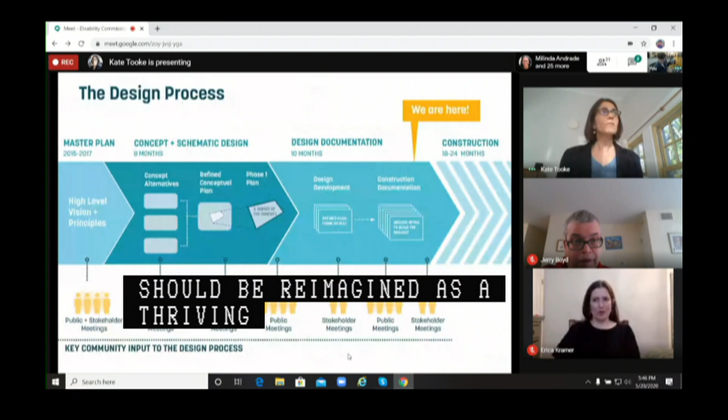You know that it's 8 acres of brick as it stands today. This process was really started in 2015 by Mayor Walsh, who stated a vision that the plaza should be reimagined as a thriving, healthy and innovative space that made Bostonians proud. That launched a process which has been several years in the making, starting with a master plan of both the building and the plaza led by Reed Hilderbrand and Utile, two local design firms.

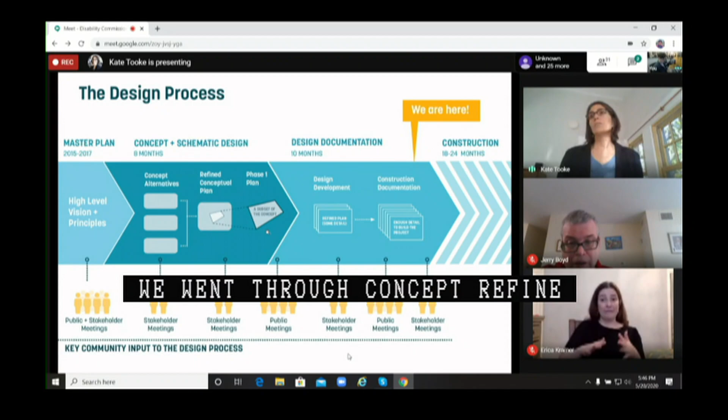Sasaki was brought on to lead a concept and design process for the first phase of renovations. There have been a number of different opportunities for stakeholders as well as the public to interface with the design throughout the process. We went through a concept refinement process where we looked at many different options, revised and refined those into phase 1, and are now at the very end of a construction document process and ready to break ground this spring.

Again, we've spoken to a number of different stakeholders throughout the process. These are constituents from all over Boston, young, old, many different interest groups, including many times meeting with the disability commissioners and staff members. We heard a lot of different things about the plaza, everything from universal access being really important to shade and comfortable seating.

What we did as a design team is we took all of that great feedback and summarized it into 4 guiding principles for the plaza.

So a welcoming and civic front yard is really about daily use, ensuring that the plaza can welcome all Bostonians, no matter how they arrive at the plaza, and help them be comfortable for daily use.

A flexible and accommodating event venue is about ensuring that the plaza can host a diversity of different kinds of events year-round, 24/7, and really make those events comfortable and welcoming to all Bostonians.

A model for sustainability and resilience captures all the feedback we heard about ensuring that this renovation really models the best thinking about 21st century practices in sustainability and resilience.

And finally, a renewed cultural and architectural legacy captures all of the great feedback and thinking we heard from the preservation community about how important Government Center is in the history of Boston and what it means as a brutalist building, and how to reinterpret that civic legacy.

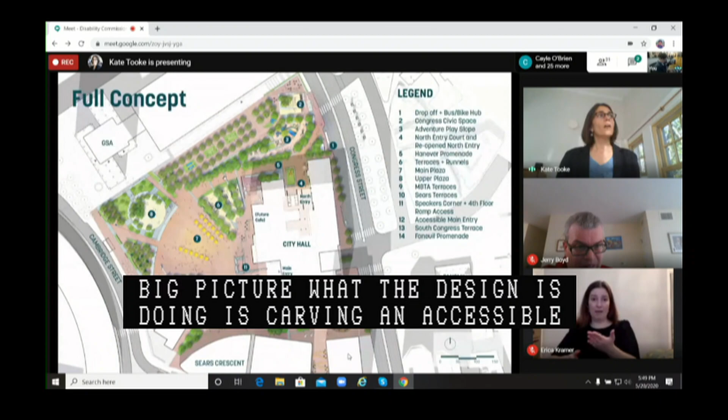So this here is the full concept plan. I'll walk you through it carefully. Cambridge Street is high up, where the MBTA head house is. Congress Street is low down, about 25 feet in grade difference between those two things. Big picture, the design is carving an accessible route, a less than 5% sloped walkway, which comes from low down Congress Street up into a right-sized, smaller main plaza.

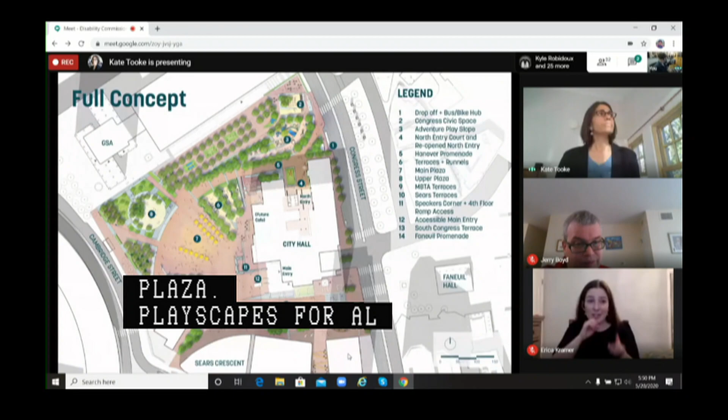There's an upper plaza, which is a small gathering place but doubles as a stage and raised stage area for a large event on the plaza. Along the way, as you come up that sloped walkway, you see a new civic pavilion building, an outpost of exciting activities from City Hall on the plaza. A playscape for all ages, bringing exciting adventures for families to the plaza, and many gardens and places to be and hang out.

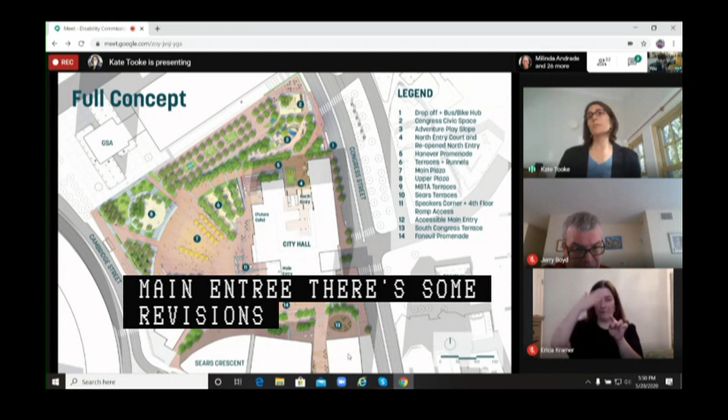There's a revised and renewed North Entry courtyard, because the North Entry, which has been closed since 9/11, will reopen to the public with new security infrastructure, allowing people to access that lower second floor transaction area of City Hall more easily from Congress Street. Coming around to the main entry, there are revisions to ensure a great speaker's corner at the front entry of the building, and universally accessible access to the main entry as well as up to the 4th floor terrace.

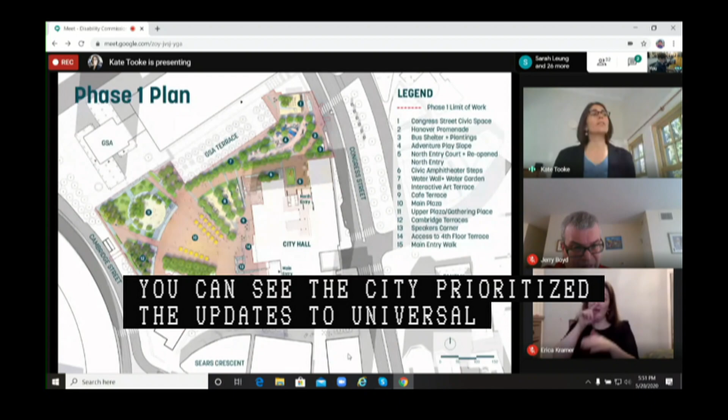You can see the city prioritized updates to universal accessibility all the way through the plaza, carving that accessible route from Congress Street all the way up to Cambridge Street. All of the upgrades to the main plaza and upper plaza, allowing many different kinds of events. The North Entry, the Playscape, and opportunities to host events at a new civic pavilion on the plaza.

I think I've mentioned universal accessibility many times already, and as I've said, it's an important priority of the mayor's office and a driver of this design. When we say universal design, our goal is to bake into every part of this design access for all ages and all abilities, so that no matter how you arrive at the plaza, you can arrive side by side together with your friends and neighbors who may have different needs and different abilities.

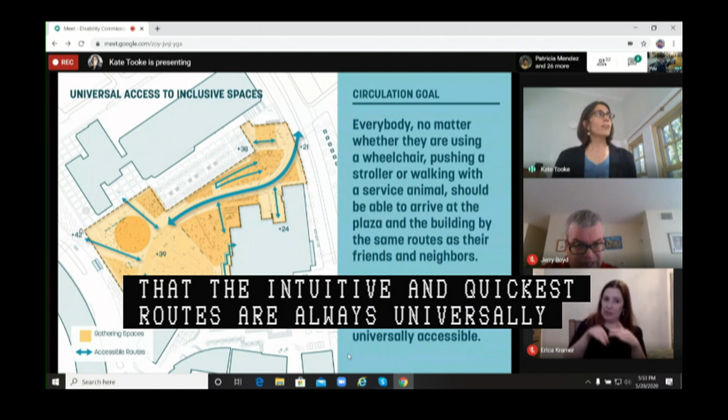So this map of the plaza, in the solid blue lines, shows accessible routes through the plaza. Again, the goal here is that the intuitive and quickest routes are always the universally accessible ones. Where there are now stairs blocking access into the plaza from many parts of Cambridge Street, there's now a welcoming access point. From Congress Street, the same thing, a really welcoming access point. There are main routes to all parts of the plaza that are intuitive and welcoming and universally accessible, the majority of which are less than 5% sloped walkways.

We're going to walk through a couple of what those experiences look like. Again, we're going to contrast for you what exists today and what the future is going to look like.

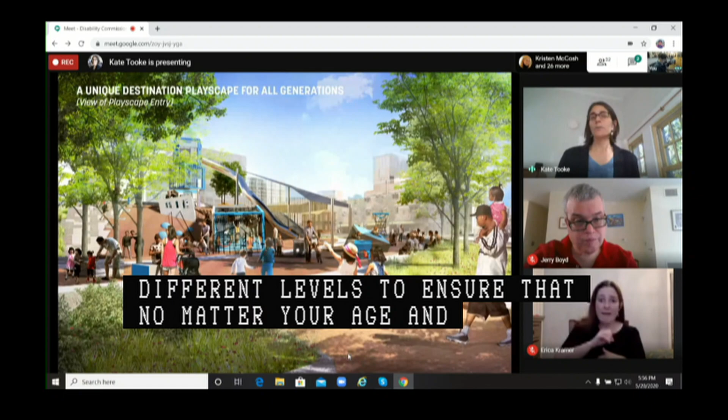Coming back to Congress Street, turning a bit from the view before, this is an MBTA head vent structure that needs to remain. The vision is to tuck an exciting new piece of program called the Civic Pavilion into that grade change. Just off to the left is the playscape I showed before, and here is the Civic Pavilion, where meetings like this, in an era past COVID, might take place in the future. It's a boardroom, as well as a building with critical infrastructure for the plaza—restrooms, as well as mechanical infrastructure supporting the plaza's operation—a fun and exciting outpost of civic activity on the plaza.

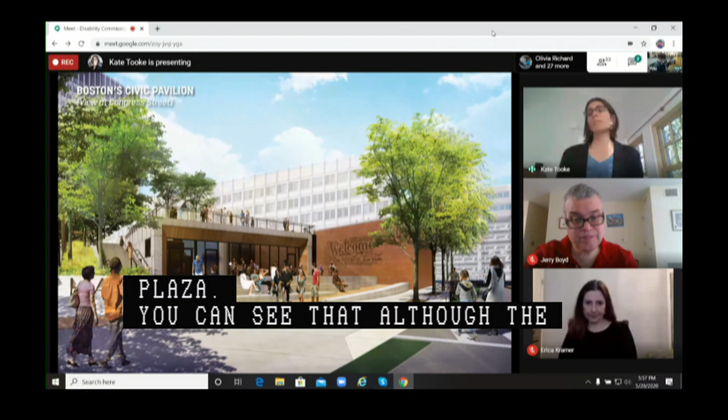You can see that although the building has to be raised up from the sidewalk level a bit because of the MBTA tunnels underneath, there's an intuitive and accessible route leading from the sidewalk right up to the main entrance of the building. On top of the building there's a roof terrace, accessible from the GSA terrace beyond, providing a great space for events as well as viewing the city on a daily basis.

Seating is integrated throughout the plaza. As a design team, we've considered many different ways of providing seating that is flexible for people of different ages and abilities. There are areas of seating that are backless and armless, and areas with arms for folks with limited mobility to push up more easily. There are numerous opportunities for companion seating throughout the plaza at the edges and integrated throughout seat walls, so a real diversity of seating that is inclusive and welcoming to people of all abilities.

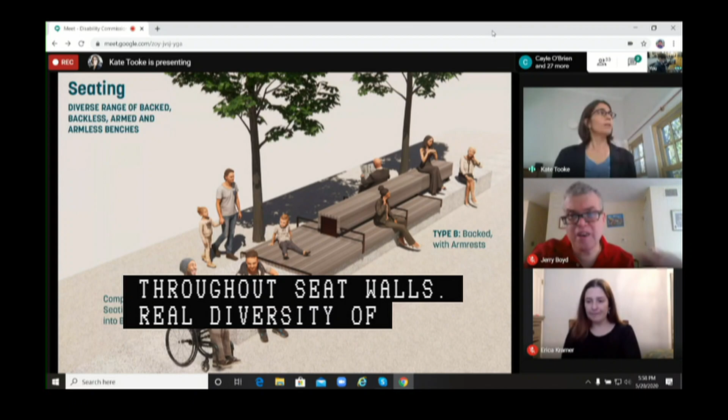We wanted to pause and talk specifically about pavement materials and surfacing. We have heard throughout the process that there is significant concern among the disability community about the material of brick as a pavement material in Boston. So we wanted to tell you the story of brick on the original plaza and why the city is electing to continue that legacy.

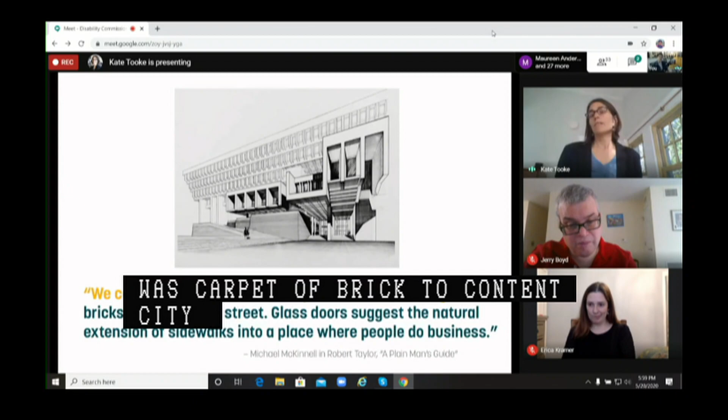This is a sketch from the original architects. They had this poetic idea about the use of brick, that it connected the city's historic brick sidewalks through the plaza—a carpet of brick connecting those sidewalks with the lower public elements of the building. So there was this idea about brick symbolizing public access to city government. Throughout the design process, it's become clear from the preservation community and others in Boston that preserving that legacy of brick, connecting the city sidewalks to the lower parts of the building, is something that really should be preserved.

So the question was really, how do we do that in a way that's accessible? This diagram shows what the original plaza structure looked like. You can see the original structure was a series of brick terraces separated by granite stair treads, shown in the darker blue bands. The jointing in the lower right-hand corner really reinforced a fanning pattern in the original plaza structure.

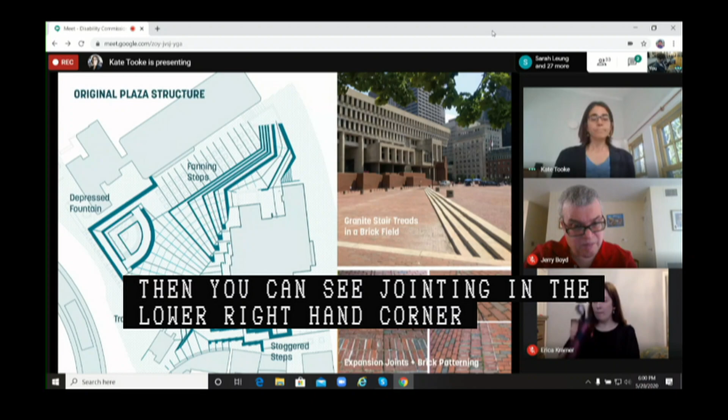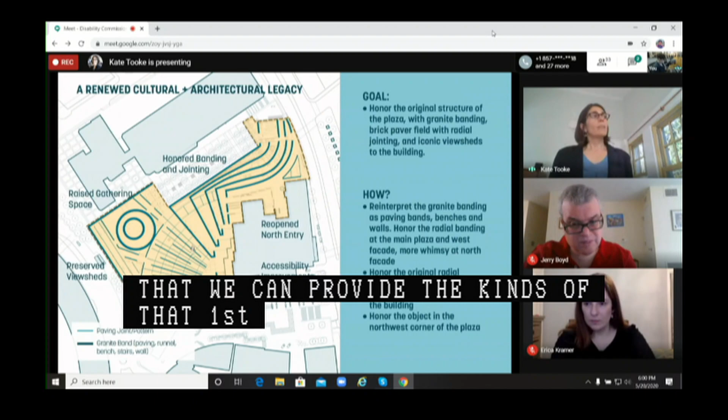What we've done in terms of civic legacy is look at that structure and update it. The goal is to honor the original structure and the original iconic view sheds of the building, but reinterpret it somewhat, bring it up to date with modern standards of universal access, and allow that legacy to live on while ensuring we can provide the kinds of spaces 21st century Bostonians need. So we're preserving view sheds, honoring some of the original banding and jointing, and iterating on it where we can and where there's more flexibility in the historic structure.

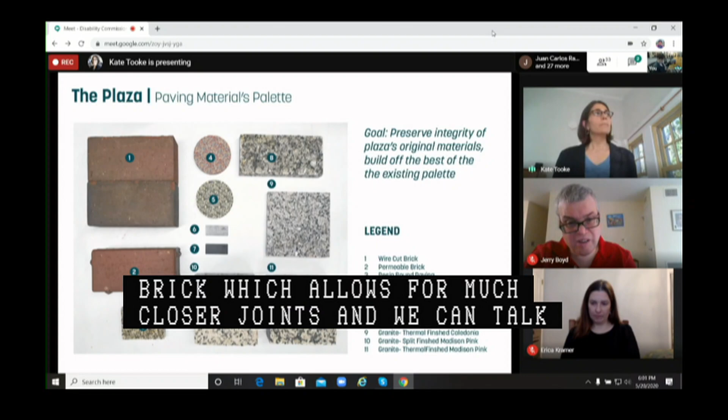Here you can see the paving palette. Again, we're trying to preserve the integrity of the original materials and build off the best of that, the same way the recent renovations at the MBTA head house did—using some of those materials, updating the brick to be a more accessible version of the original. So here you can see we're not proposing the old City Hall brick, but instead a wire cut brick, which allows for much closer joints. We can talk about what that means, as well as the several different colors of granite that are part of the Plaza palette today.

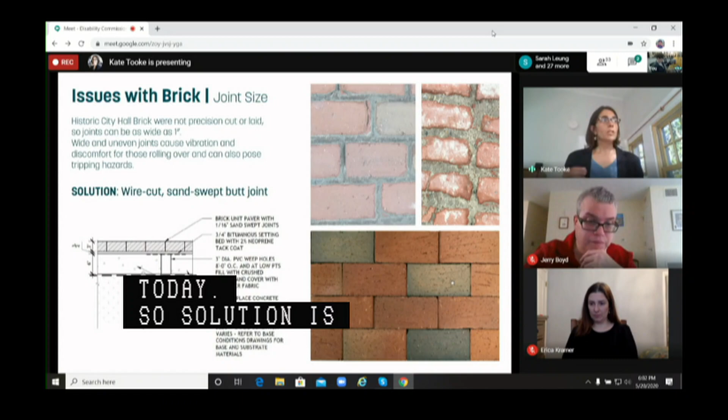We understand that joint size, particularly on the existing City Hall, is really challenging—those can be up to 1 inch in depth, made even worse by chipping of bricks that exists today. The solution is a wire cut sand swept butt joint, which can be less than 1/16 of an inch, providing a minimum of joint and a minimum of vibration to roll over.

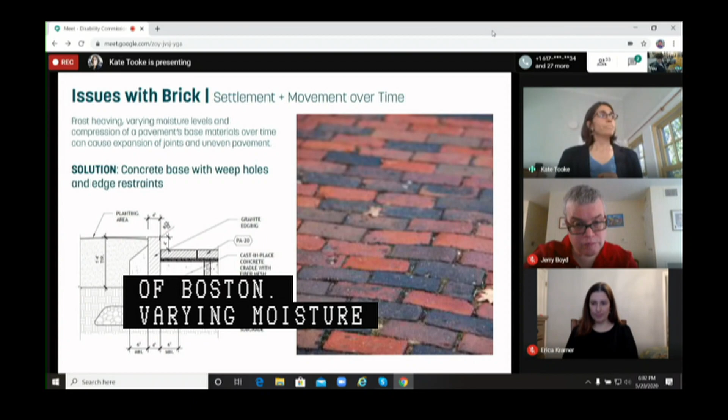We understand that settlement and movement over time are also significant issues with brick in the city of Boston. Varying moisture levels cause that heaving, so the solution is ensuring we're setting those bricks on a concrete base with weep holes and edge restraints that ensure minimal movement over time.

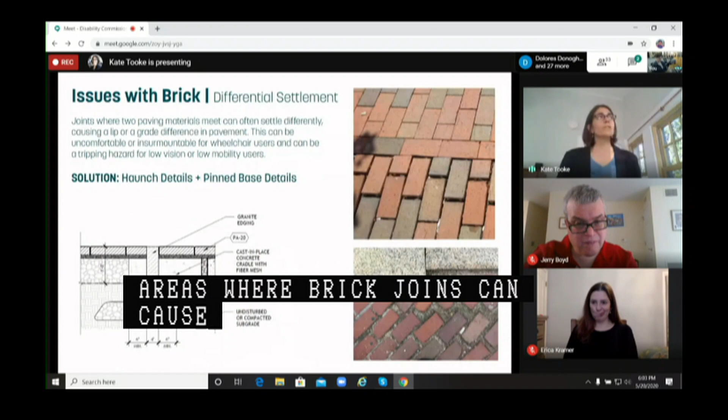Differential settlement at areas where brick joins with other material pavements can cause tripping hazards and significant challenges for those using wheels. So we're proposing haunch details and pinned bases to ensure that settlement and movement doesn't happen or occur long term.

There's a significant series of success stories within the city, specifically at City Hall Plaza, incorporating these kinds of details with brick into historic patterning. Right on City Hall Plaza, the Washington Mall accessibility project, as well as the renovations at the MBTA, those details have been installed and withstood many winters of plowing and snow removal, and not a single one has popped up. It's still a really universal, smooth, accessible surface. The city is very pleased with the performance of this material.

We've heard several times from the disability community that minimizing the joints is really critical. So aligning the brick patterning with the direction of travel, so that the longitudinal length of the brick is along the direction of travel, is really important. You can see that we've done that on all of the main paths of travel. The longitudinal direction is the one you'd be traveling along, to minimize the joints that you roll over.

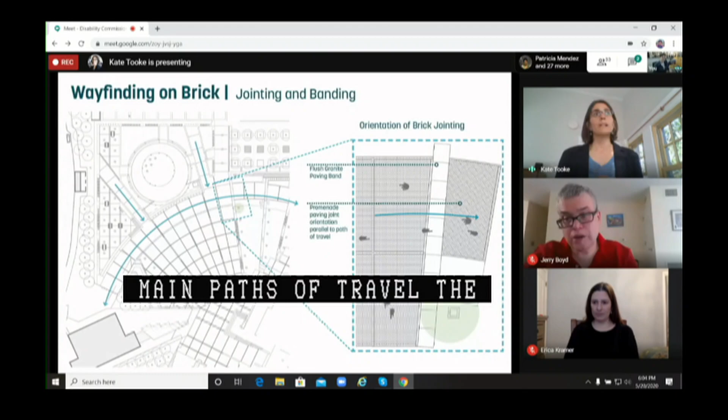In terms of wayfinding, we've really been thinking hard about the many different ways that people find their way through the plaza. That includes signage, making sure it's accessible, has pavement in front of it, and can be rolled right up to. But it also includes consideration of edging.

You'll notice that most of our main routes, like this one, have granite curbs next to them to ensure that those navigating with canes have an edge restraint they can navigate against, as well as a visual contrast for those in the low vision community, to ensure they can maintain the direction they're hoping to maintain.

So we're going to dive into City Hall and think specifically about the renovations at the north entry and the west ramp. We'll start with the outside of the north entry, and then my colleague Nat will take you through some of the improvements on the interior of the north entry.

What the renovation plans to do is take the facade and subtly move it out to the edge of the brick fins, providing a new entry court that allows people to stay and play and be part of that entrance. The security infrastructure is included in that renovated lobby. It's really an exciting opportunity to open the lower reaches of the building again to the public.

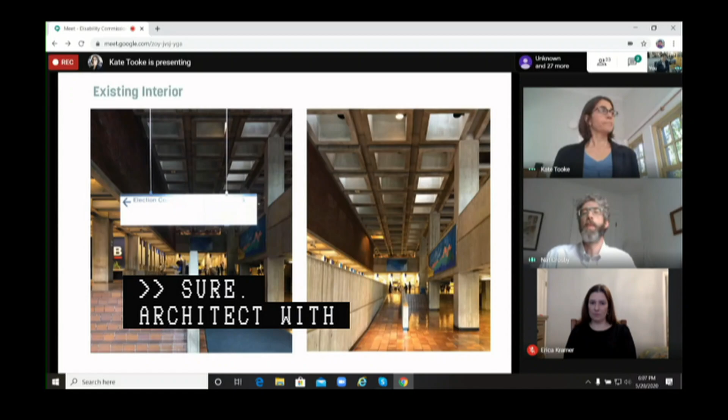Viewing from within, there's an existing ramp that brings you from the second floor entrance level to the second floor mezzanine level, which you can see here on the right image. But that ramp, although nominally one in twelve, is irregular in its tile placement, and it's missing a landing to be in keeping with the current code. So the tile here on this ramp, which you can see in the plan, will be removed, and a new ramp will be installed that extends a little further and adds a landing.

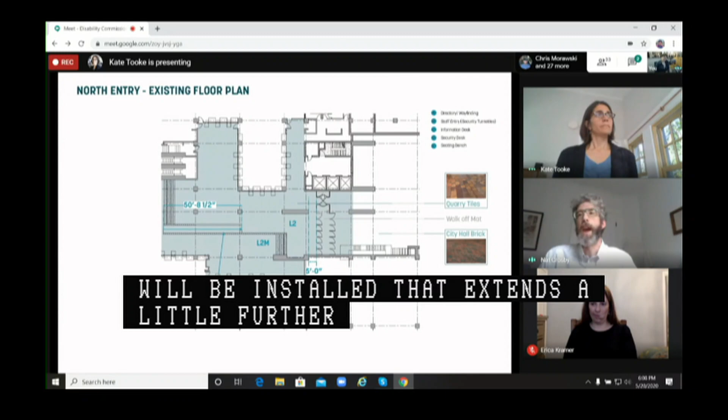And we'll be adding handrails to both sides of that ramp to allow easier access up and down. In the facade, the other components we're changing, as you can see in the existing plan, is the location of the vestibule and the doors, and that revolving door between these two piers.

In the renovated scheme, that vestibule will move further out of the building, which allows for security features and a welcoming information desk and turnstiles, similar to the west entry facing Cambridge Street. You'll be able to come in through any of these doors and navigate around. If you're staff at City Hall, you can enter right in with your access card, or move around and get scanned.

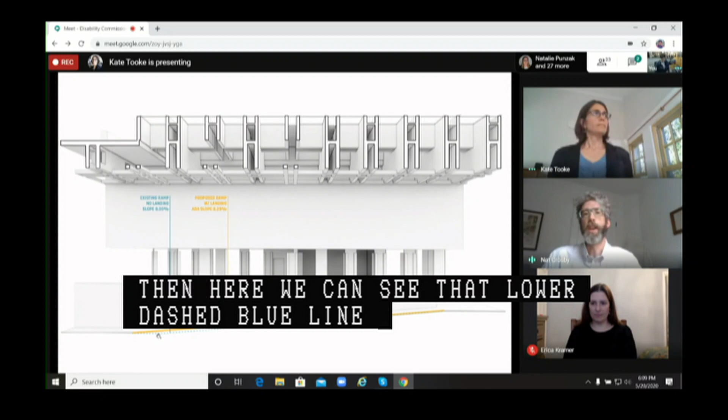Here we can see that lower dashed blue line is the existing ramp, and that subtle change happens at the lower level, particularly where we're installing the landing and lifting up that bottom portion. This surface of the ramp will be a concrete surface, uniform and consistent.

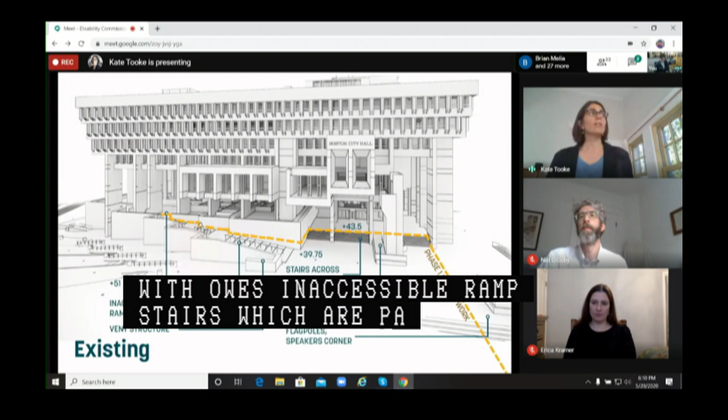This diagram summarizes the existing condition with those inaccessible ramp stairs, which are part of an egress route for the daycare housed within the building, and really need to be updated to an accessible egress, as well as the stairs, which provide 2 separate means of access depending on your ability.

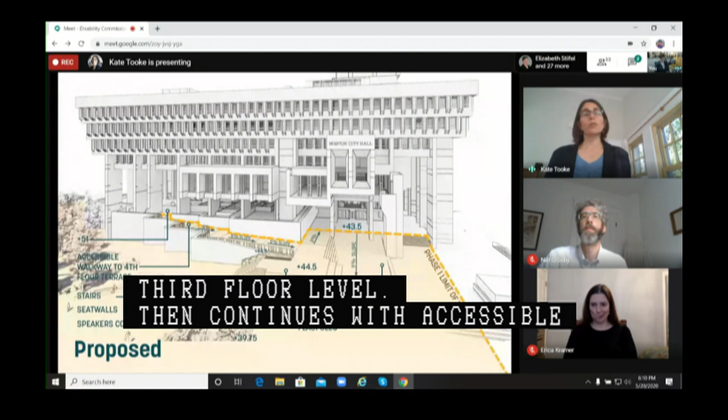So the future is an opportunity for everybody to enter towards the 3rd floor main entrance on a universally accessible, less than 5% sloped walkway, which brings you up to that 3rd floor level, and continues with an accessible route all the way up to the 4th floor terrace, which will hopefully be activated in the future by the city. It's a really magical and majestic part of the building if you haven't been there before.

On the way, there's an opportunity to integrate an accessible landing, which we call Speaker's Corner, an opportunity for the mayor and other important speaking events to occur right at the front door and the important west facade of the building. So it's an accessible landing for everyone to be welcomed at.

You can see that on a daily basis, the entry is universally accessible. Everybody arrives via that same sloped walkway, with lots of places to sit and companion seating integrated throughout that Speaker's Corner, and then that accessible route which brings you up to the 4th floor terrace.

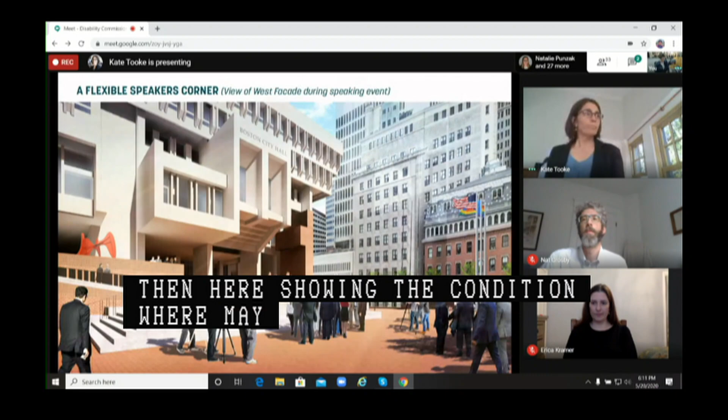And here, showing the condition where Mayor Walsh, or any potential future mayors, or other important announcements may occur right there at the front door of City Hall, with the important west facade behind, and the opportunity for that to be a place where anybody can get to and really stand next to the mayor for important city announcements.

So we wanted to end by coming back to these same 4 guiding principles. I think it's important that the plaza be welcoming for everybody, and really incorporate universal access on a daily basis, as well as opportunities for events, modeling sustainability and resilience, and renewing the cultural and architectural legacy, updating it for 21st century uses. That's really been an underpinning of the project, and the result is a reinvigorated civic heart of Boston, which we are excited to begin implementing in just a few months' time.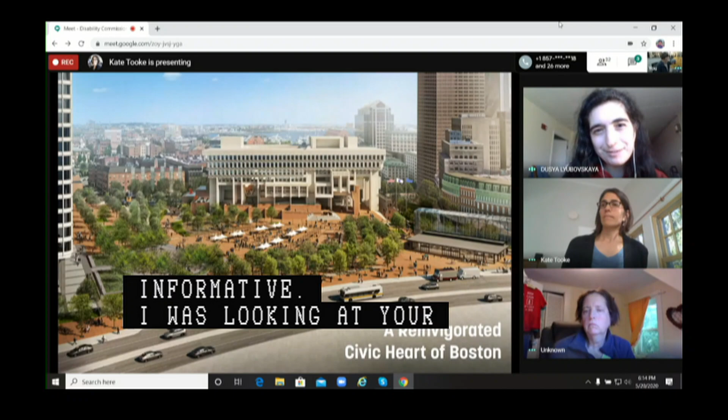I am wondering, I was looking at your maps and the pictures, and I have a concern regarding the construction itself. I did not quite understand when the construction will start. However, I am concerned about what will happen during construction. We don't really know what the situation will be with the lockdown, but during, let's say June, July, August, hypothetically, when staff or anybody is entering the building, what will happen? I know it will be very complicated. Will people be able to enter the building during construction, or will there be a special way to navigate whether you are disabled or not? What will happen during that situation? Because during construction, that's even more inaccessible in a way. So that's my main concern.

Thank you. Dusya, thank you for the question. The city has engaged Shawmut Design and Construction to manage the construction process, and they have put together a plan.

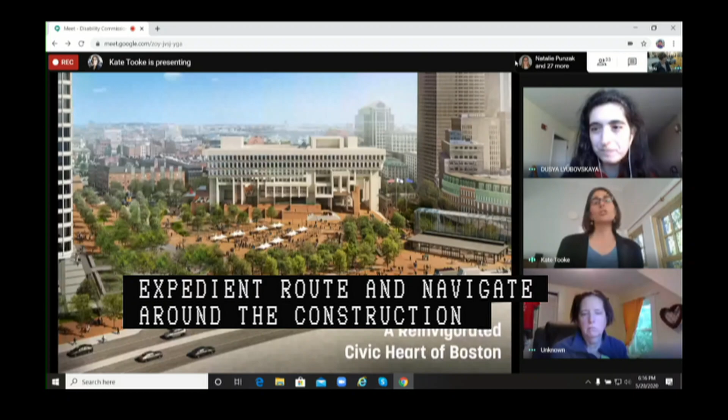The plan looks at the phasing of construction, as well as when fences go up in various areas, and ensures there is signage to direct people to the most expedient routes to navigate around the construction site. That said, I can assure you positively that there will be access to the building throughout the entire construction process. Some access at the north entry, which is currently closed to the public anyway, will be limited, but the main entry will stay open throughout most of the construction, and really just be impacted towards the end when those improvements I showed last, at Speaker's Corner and the main entry, would happen.

But there will remain access to the building throughout, from Congress Street, and most of the time from the main entry as well. The fencing will incorporate signage to direct people around the construction site to ensure there are still accessible routes around City Hall Plaza during construction to other destinations within the city.

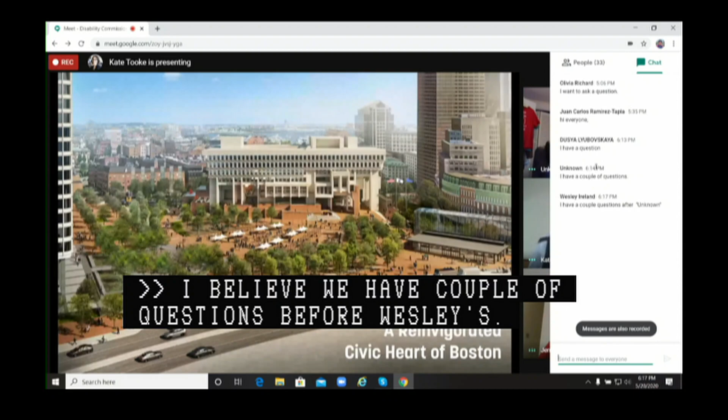Well, my question is about the brick. There is a whole lot of brick. I thought there would be more of a variety of materials, especially on the universal walkway, that would be more contrasting to the brick rather than everything all the same color. I work for the Commission for the Blind.

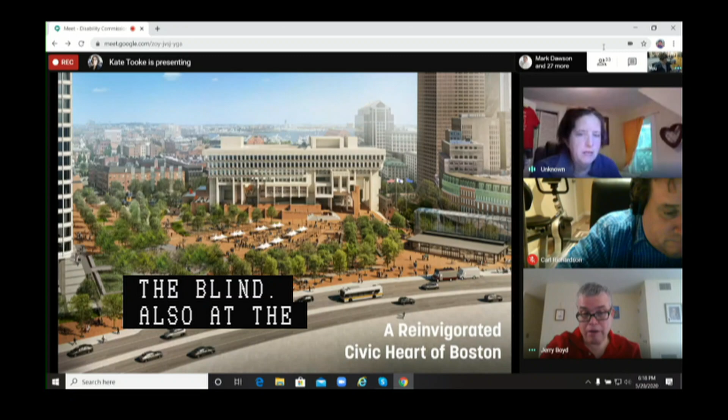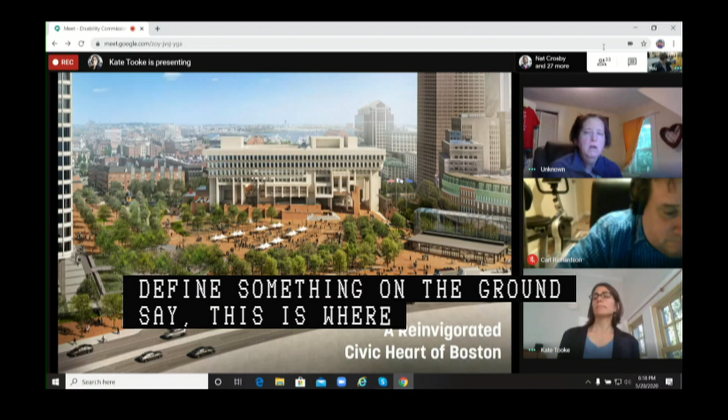Also at the Speaker's Corner, one suggestion I would have is around the area that people stand, it would be good to have a different color or different texture, kind of roping out where people should stand away from the entrance. I've been there when there's been speakers at the entrance and it blocks the main entrance for people coming in. So it'd be nice to have something defined on the ground to say, oh, this is where I stand to listen to the speaker, as a visual landmark for those people.

And my other question is, I didn't see in the designs where the wayfinding signage would be, directing people on what routes to get to the main entrance, to get to the T station at Haymarket or whatnot. Where would those be located on the plaza?

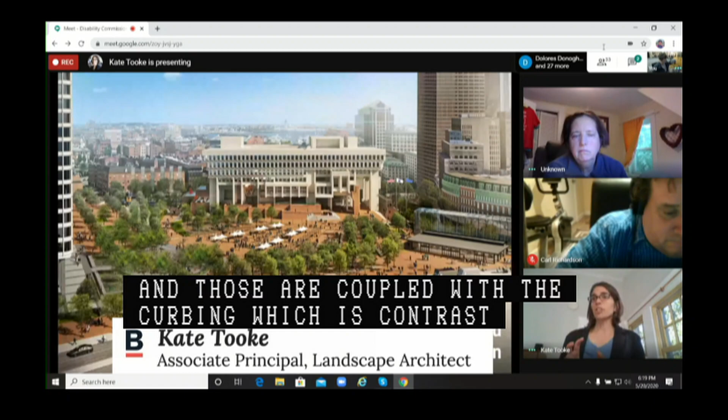Sure, those are all excellent questions, and the design team has been considering each of those. I'll answer your first question first. In terms of pavement differentiation for the low vision community, the design incorporates pavement bands and jointing within the brick. One of these is what we call a wayfinding band, a larger band within the brick of different textures that continues and leads people from the sidewalk all the way to the main entrance of the building. These are coupled with the curbing, a contrasting material in both color, texture, and height, all incorporated to ensure the low vision community has guides and wayfinding to the main entrance of the building.

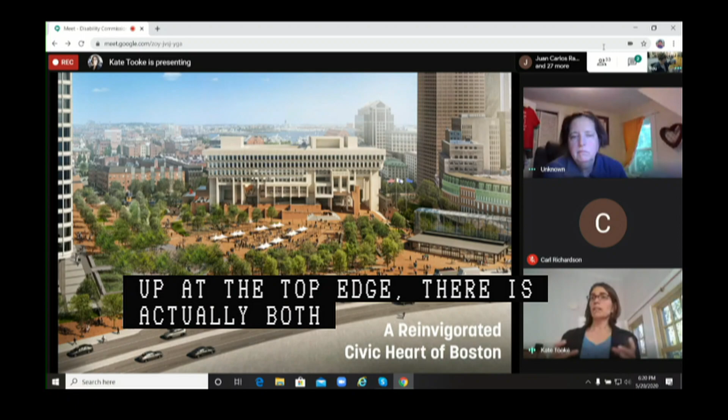Around Speaker's Corner, there is both a visual differentiation in the contrast between granite and brick, as well as a 4-inch curb that prevents someone from rolling off or inadvertently walking off if they're using a cane. It protects you from that edge. There's also jointing and banding within the brick patterning, which differentiates the main walking route from areas where you might stand. Hopefully that helps answer your question.

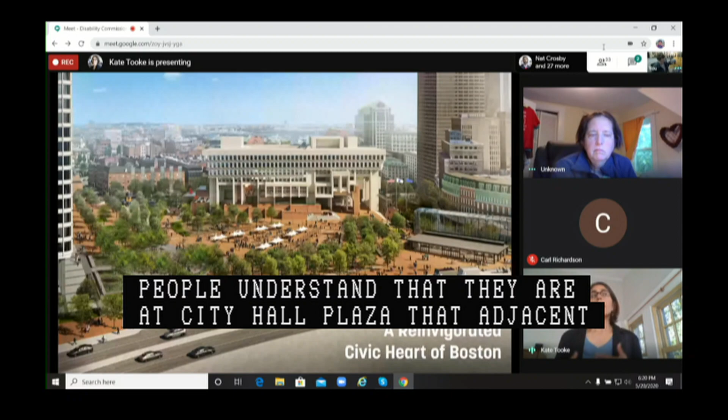Finally, there is a signage plan, and I recognize we did not include that tonight, but that's something the design team is really considering—where signage needs to be and what the messaging needs to be to ensure people understand they're arriving at City Hall Plaza, that the adjacent buildings have a different function, and where to find the amenities they're looking for in City Hall Plaza in particular.

And Kate, this is Commissioner Kristen McCosh. Thank you—loop our team in when you get to the wayfinding piece of the planning. Sure, yep, great.

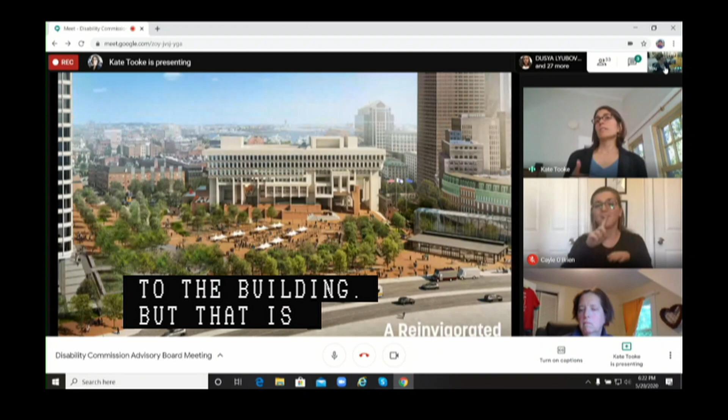Sure. So right now there's an accessible ramp right adjacent to the building, but it's pushed to the side of a series of granite steps, which provide a barrier to your access to the plaza. In the future, rather than a separate ramp and a series of stairs, there's one main welcoming access to the plaza where everybody arrives together on a sloped walkway that is less than 5%, so that most intuitive route up into the main part of the plaza is one that everybody arrives at together on one promenade called the Hanover Promenade.

I hope that answers your question, Leslie. Yes, thank you, that does clarify it.

And my next question is about the Civic Pavilion. You mentioned a roof terrace—will the boardroom be under that roof terrace? And also, what's the square footage of that space? Yes, so I'll defer to Nat on the square footage.

There is a roof terrace, and that roof terrace is accessible from the GSA terrace. You can see the GSA terrace is a high-up plinth of landscape that sits adjacent to the plaza, so that would be accessible from this main GSA terrace on the roof. The lower level is accessible from the sidewalk, and that is where the civic room is—we call it the civic living room. It's a place where meetings like this could happen in the future.

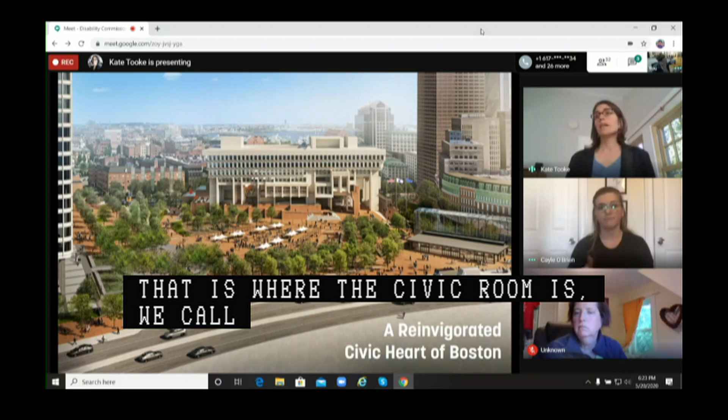Very similar to the size of room 811, I believe it is, at City Hall, where you frequently meet. Nat, can you chime in with the size of that space? Yeah, it's about 1,200 square feet. Thank you. Okay, so that'll fit probably 30 to 40 people, roughly, I'm assuming.

And then my next question—I really enjoyed your presentation and the talk about the green areas, so I'm wondering, related to that, how many green areas will you install there for the public? There are a number of different places to sit and be on a daily basis. The design includes over 100 trees to provide shade for the plaza, as well as numerous areas of planting.

The planting is being designed to rely on native species, but also species that provide visual interest throughout the seasons, and to be low maintenance and durable to city needs and climate. So there are many areas of planting, over 100 trees, and many areas to sit on a daily basis. I'll highlight some of those.

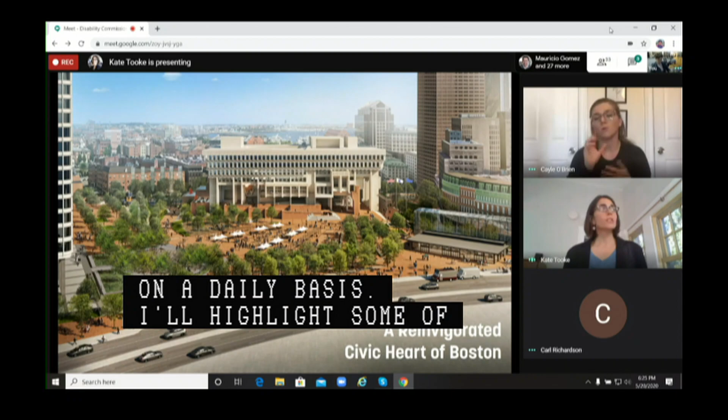There are terraces along Cambridge Street. There's a place adjacent to the GSA building and Cambridge Street we call the Gathering Place, which is a really nice spot surrounded by planting to gather on a daily basis. The Arts and Culture terraces, nestled up to the northwest corner of the building, would be activated with public art on a revolving basis, but are also a great place to sit and be on a daily basis, with a water feature running through it.

And there are terraces also adjacent to the MBTA terraces, so there's an extent of that space as well. The play area also has places to sit and be, as well as the north entry coming around this corner—both nice shady spots with planting surrounding them as well.

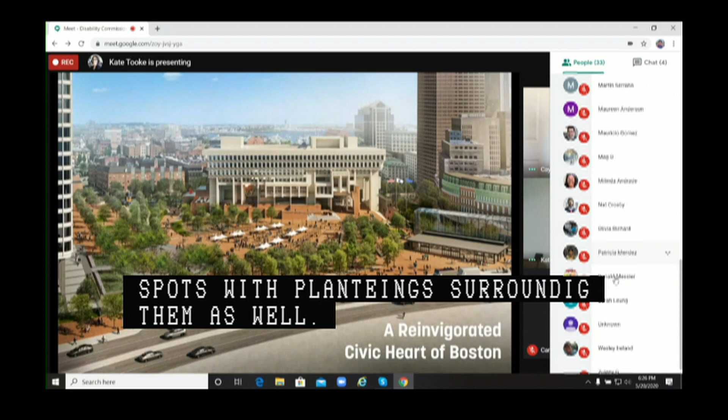Okay, thank you so much. Thanks. Great, I think that's all the questions for me.

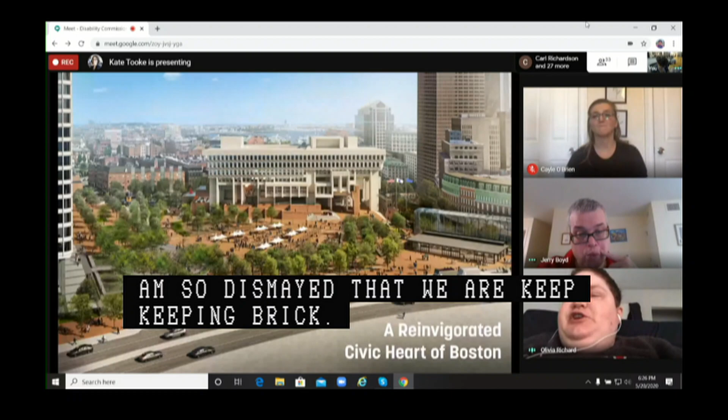Not a question as much as I am so dismayed that we are keeping brick. Even the government center brick, the new brick, is really uncomfortable. When you get bumps and stuff, it can get slippy in the winter. And also the granite, when it gets wet, it doesn't have a very good friction against the wheels of a chair that's lightweight, and most manual chair makers now are lightweight.

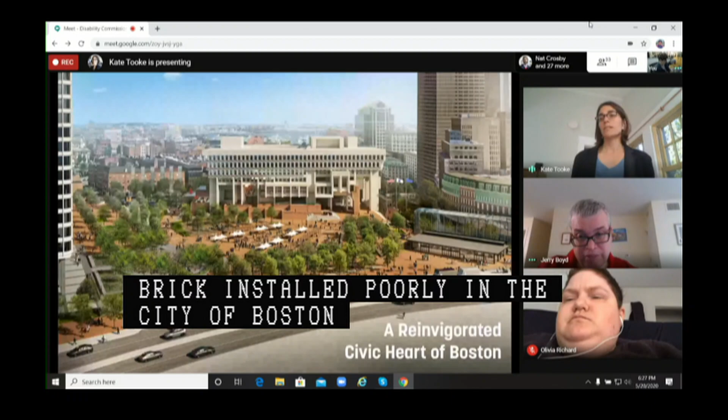Thank you, Olivia. We hear that concern, and it's something we take to heart. We're looking at every way that we can detail brick to ensure it provides a smooth and comfortable surface over the long term, to minimize the joints necessary to roll over, minimize their size, minimize the potential that they might settle and create more discomfort, and ensure it remains smooth and stable for the long term. There are a lot of examples of brick installed poorly in the city of Boston, and it's our goal to ensure this is the best brick installation, providing a uniform and comfortable surface for the long term. That has been an important priority of the city, to balance the needs of the preservation community and the desire to preserve the historic legacy of the building, while also meeting the needs of the disability community and ensuring we're detailing brick to make it as comfortable and easy to navigate as we possibly can.

I really appreciate your concern.

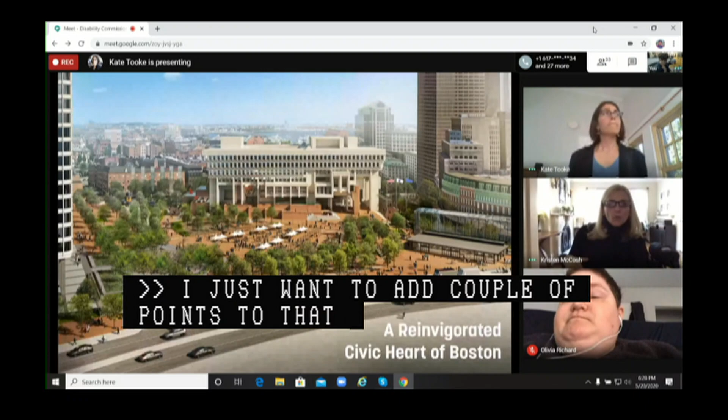I just want to add a couple of points, Olivia. We have talked with the design team about the direction of brick, so it will be going the long way in the direction of travel, which will minimize to some extent the joints. We've also talked to the property management and public facilities departments about maintenance, and they've made a commitment to maintain the brick, because the old plaza suffered from a lack of maintenance, not through anybody's specific fault, but it just deteriorated pretty badly. With all the money they're investing and all the pride the city has in this design, they've made a real commitment to maintenance. That's something we trust them on, and if not, we'll be right on top of them to make sure it gets maintained. Thank you.

I know Carl has a question. I too am disappointed that we're using brick, but I want to make sure - are we replacing all the old existing brick with wire cut bricks, so there'll be none of the old brick with multiple joints, or is it going to be a hybrid?

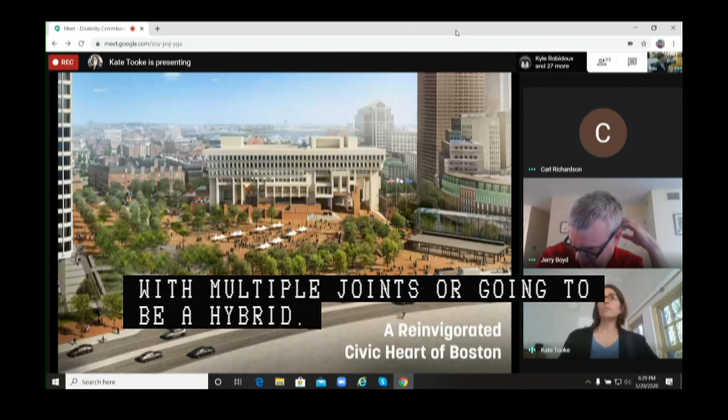Carl, all the pieces that are part of the phase 1 renovation will have the new wire cut brick. So in that colored map I showed at the very beginning, any piece that's part of this phase of renovation, which includes most of the north side of the plaza and most of the west side of the plaza, will have the new brick. The south side of the plaza is part of a second phase of renovations and will remain as is until the city begins that second phase.

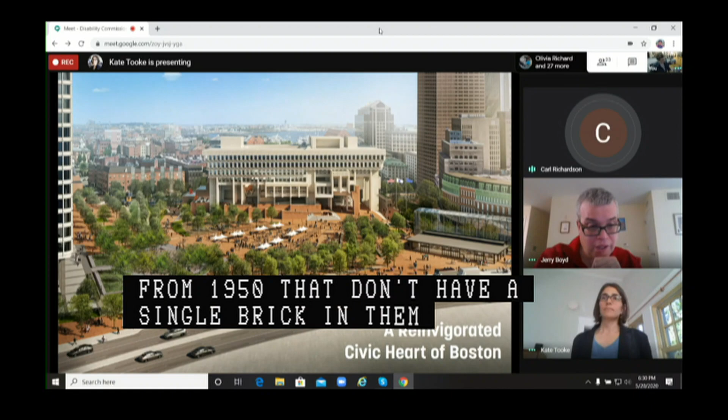The other thing is you keep saying you're doing this because of historic preservation. I have all kinds of pictures of Scollay Square from 1950 that don't have a single brick in them. So when they say history and preservation, you're only talking 50, 60 years - you're not talking that, and I'm almost that age myself, and I don't like to consider myself historic. So that's just something I'll say.

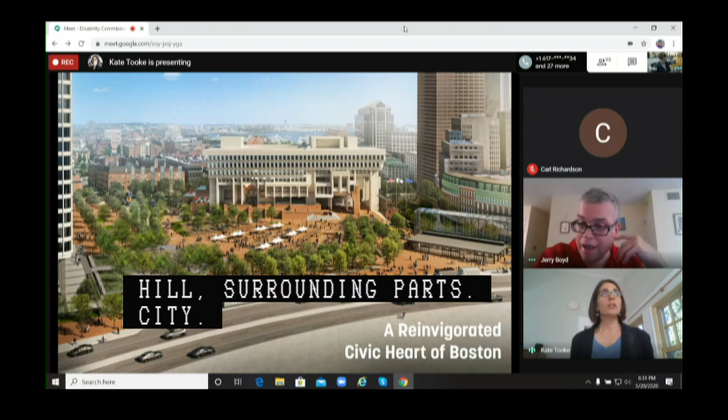Understood, Carl. The original design intended to connect the city's historic brick sidewalks, some of which may not have been in Scollay Square, but were throughout the city - in the North End, the West End, Beacon Hill, and the surrounding parts of the city. But I really appreciate your comments about Scollay Square. I didn't know that there was not a lot of brick in that original part of the city.

I just wanted to take a moment, this is Jerry, to also say that I'm disappointed that we're going to be using brick. I can understand the various historical societies, preservation societies, and neighborhood organizations that would want it, but no matter how we dress it up, it is a barrier for folks with disabilities to access, and it is definitely not the preferred material to use. So I just wanted to go on record saying I'm disappointed in that.

Can I add one more comment on that, Jerry? Sure. Just to follow up, when I saw the design too, I had the same feelings, and you won't meet a stronger advocate for concrete than me.

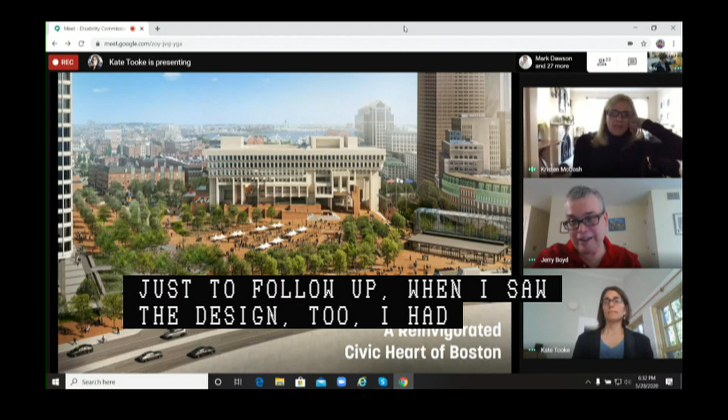But one thing I will say, in all honesty, is the work that they did on the plaza so far, where the MBTA station is, they installed a lot of brick and granite, and it has held up very well, it's as smooth a surface as I've rolled on. That gives me hope that if the installation is done well and maintained, it will still be very accessible. I know it's not ideal and optimal, but with the right installation, we can achieve a really good, accessible plaza.

I appreciate that, Commissioner, and I know you're a great advocate for the community. So I appreciate that. And we had a question from, and forgive me, the name Zuleny. Is that correct?

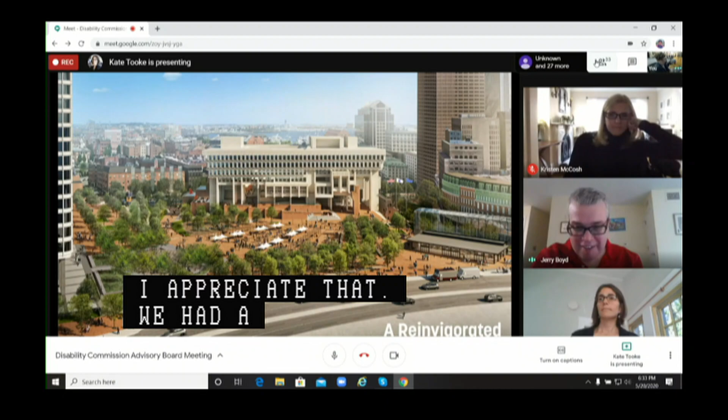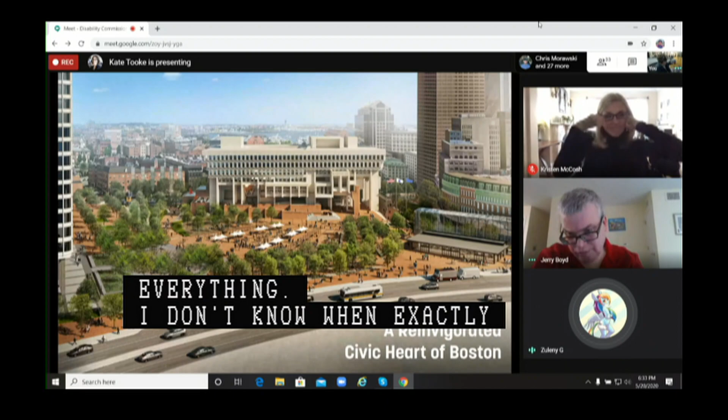Yes. So again, yes, I am disappointed about the brick, but I was also wondering, obviously we are not going to have any festivals for most of the year. But is there a time frame on how exactly this will be done? Because a lot of festivals and everything is at City Hall Plaza, and between construction and everything, I don't know when exactly this will be done. So if it is going to be done, how will that look for future festivals, not including this year?

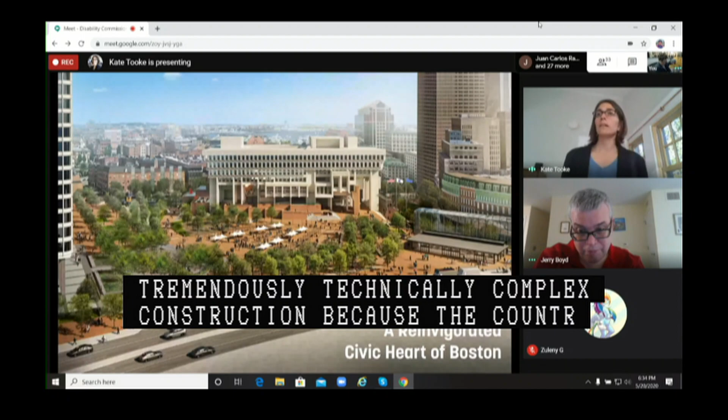Sure. The construction process, Zuleny, starts this year. We'll be breaking ground as soon as we're able to, as soon as the city's construction ban is lifted. That process takes about 18 to 24 months. It's a tremendously technically complex construction because the country's oldest train tunnels sit below this plaza. So there will be a long period of watching that construction happen in terms of the structure of the plaza before the finished materials begin to go on. So 18 to 24 months, which we know is a challenge for a city used to holding excellent and exciting and vibrant festivals on the plaza.

So the city is working to accommodate those festivals elsewhere for the duration of construction, and really working to welcome them back, because the newly renovated plaza will be a much better place to host events and will enable people and community groups from all over the city to easily come and host an event there. There will be infrastructure built in so you can do what we call plug and play. You won't have to bring your own generators and equipment, you'll just plug into infrastructure right there on the plaza, making it a much more accessible option for different community groups to host an event. I hope that answers your question.

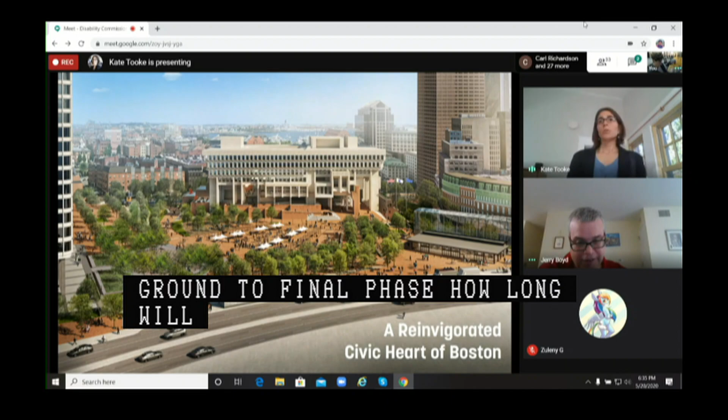Kate, just a follow-up question to that. I know we're waiting for the reopening to happen to begin construction, but from breaking ground to final phase, how long will the project take? What's the timeline? As I said, we're looking at 18 to 24 months of construction. Okay, so we can expect the plaza to potentially begin to open by the end of 2021. Great, thank you. I know Kyle had a comment.

Sure, thank you, Jerry, and thank you to the presenters. I just wanted to add also my disappointment around the brick, and to me it seems like you all are prioritizing historic preservation over access and universal access for everyone. I've also heard a majority of folks say brick isn't the preferred choice. So is there the option of going back to the drawing board and looking at other surfaces? It seems like everyone on this call would agree there are things more accessible than brick. So can you go back and look at other surfaces?

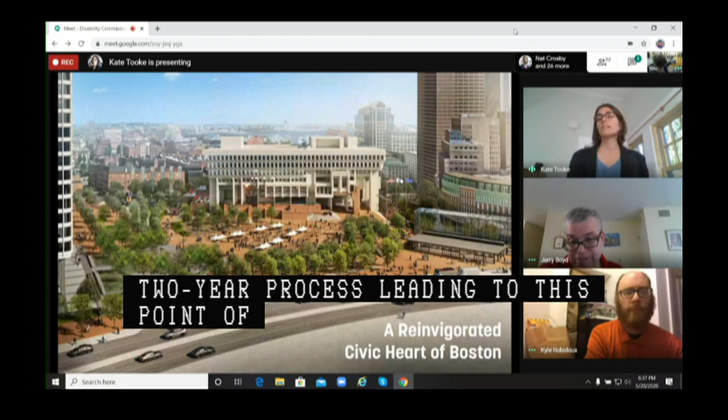I think, Kyle, we can continue that conversation with the city team and the client team. There's been, as I said, a 2-year process leading to this point of engaging with stakeholders from all over the city, looking to balance the many different interests in Boston's most celebrated and most public civic space. As a design team, we're looking to work with the city to provide an accessible, durable, long-term solution that still meets the needs of the plaza to celebrate Boston's civic legacy. We're balancing a number of things, and we appreciate your concern, and we'll continue that conversation with the city, the mayor's office, and the public facilities department about both maintenance and that material long-term.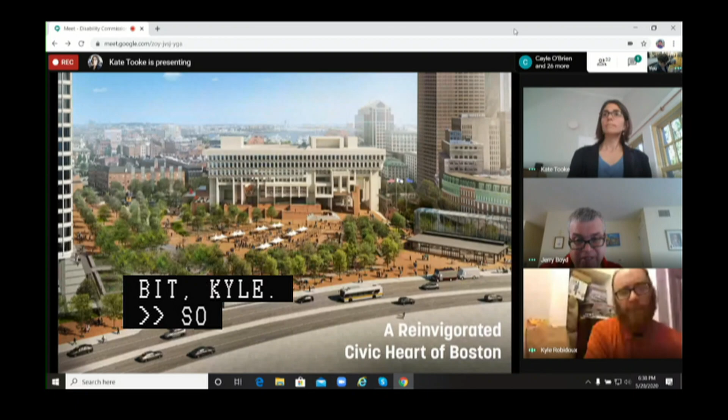May I ask how many outside of... you're breaking up a little bit, Kyle... department in terms of the design team? Sorry, I'll try again. In addition to Commissioner McCosh and the disability staff, how many folks in the design team, the city team, or the public works department are individuals with disabilities that would prioritize accessibility like this?

I can take that question if you'd like. Thanks, Kristen. So Kyle, as far as people who have a visible, obvious disability, I know there is a project manager in the BPDA who works on the same floor as us, and he is a wheelchair user. There's no one else that comes to mind. Jessica can jump in if she thinks of anybody else.

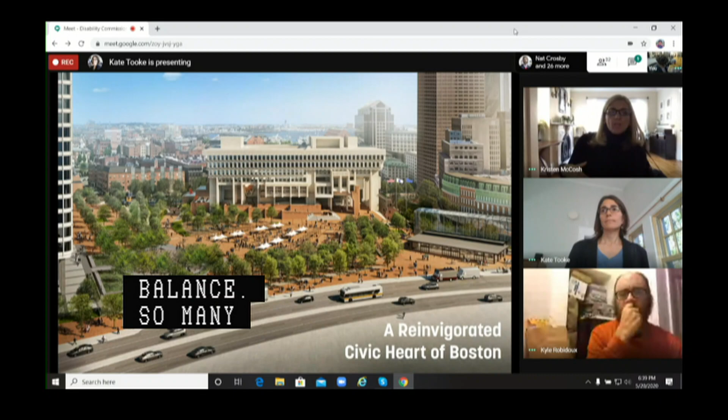But I will say that I know Kate mentioned all the offices that she'll work with, but public facilities really does work very closely with my commission, and we've made all these very clear for the months and months that we've been planning this project. So they know very well what our priorities are and what our concerns are, and I think they just have so many things to balance, so many different interests. But now that they're hearing from you, it's good that they're hearing directly from the community. Design is pretty much done, but we will continue conversations, like Kate said, to see if there's any way at all we can improve it. We certainly will.

Jessica, anything to add? No, Commissioner.

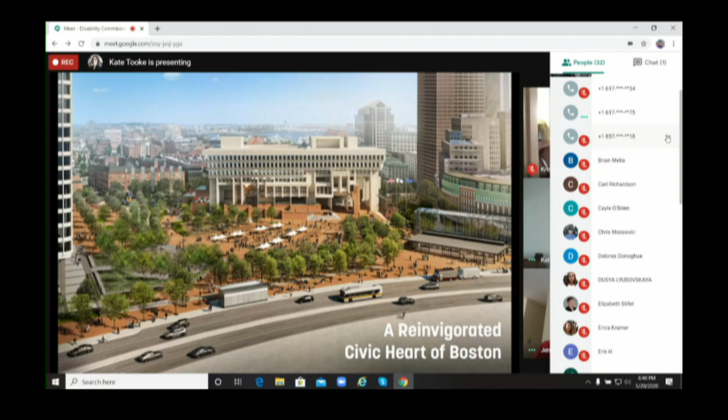Elizabeth Stifel, advisory board member from Back Bay. I'm a public health physician by training, and I think it's more than disappointing. I think that there are really significant potential issues for people in the disability community. For one thing, people with mobility issues, it's not only wheelchair users, but people who use walkers and canes or have slight balance problems. I served on the Cambridge Disability Commission, and we ran into the same issue.

A situation of needing to replace city paver brick with wire cut, which is fine in some settings, but if there's not even any path within this overall plaza that truly is an accessible way to get to the building, which, as Olivia had brought up, minimizes slippage as well as... I think that it's really incumbent on us and the leaders of Spalding Rehab, wherever, that this is more than just a point of disappointment. I'm not saying the whole surface is going to change, but I think there has to be some kind of compromise that acknowledges the overriding need for true accessibility that's safe as well as inclusive.

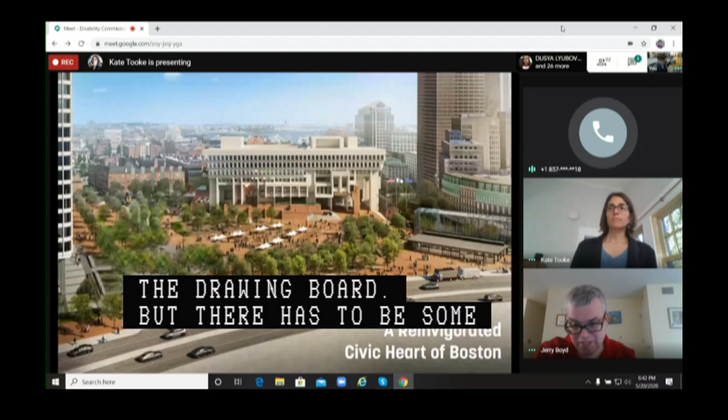There's the balance too between historic preservation, and then we have something like the Zakim Bridge, which is very modern. I'm not trying to say that this idea, what's already 2 years in the making, we know it's not going to go back to the drawing board, but there has to be some way to modify it, between the public officials, the university officials, Harvard, MIT, etc. There's just got to be some way to somehow modify this before it's fully operational.

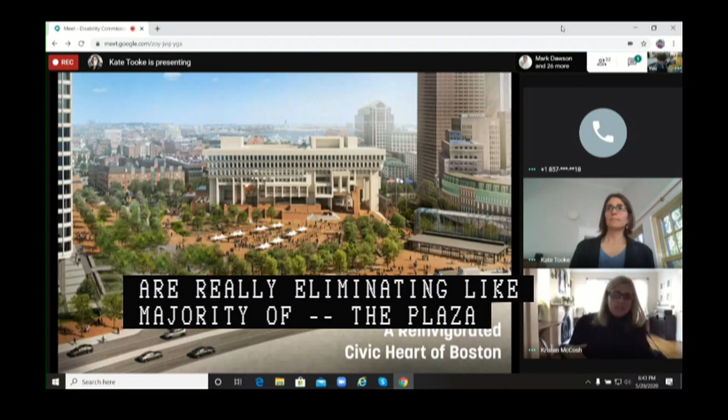Elizabeth, I can just add a little bit of insight into that. One thing that Kate mentioned, but it might not have been emphasized enough, is that they are really eliminating the majority of slopes. Right now, the plaza is awash in hills and valleys and steep slopes and steps. So all these factors, leveling the plaza, eliminating steps, eliminating steep slopes, will go a long way towards making it much more accessible and smooth, and also helping with the joints not to pop apart. But I'm not discounting what you're saying about the brick. I just want the whole board to know that I have made all these points very clear to the team, and I'm sure they will all attest to that, because we know that's the community's desire.

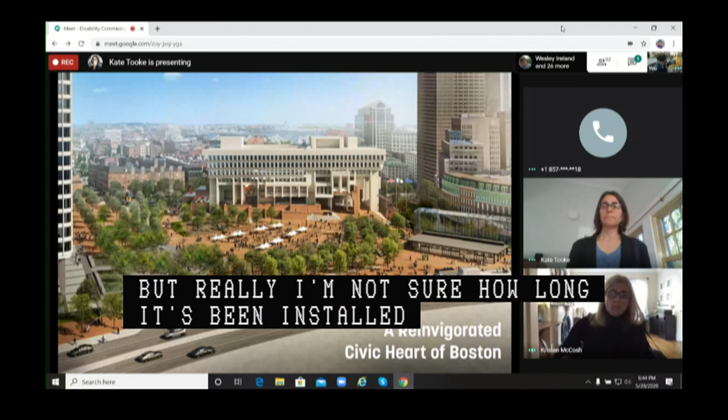But I would encourage people, once this lockdown is over, if you haven't been on the plaza yet, maybe take a ride over and take a look at the new brick and new granite. I've never been won over before, because we've heard from so many developers, 'oh, this will be different.' But I'm not sure how long it's been installed, maybe 5 years now, and it really has remained extremely smooth. I'm saying that in all honesty, I've been impressed by it. So just putting that in to give you a little insight that this is not something we're not all aware of. It's really just a matter of trying to balance the issues.

And one other point is that the slip friction is something that the team looks very closely at. Could you talk about that at all, Kate?

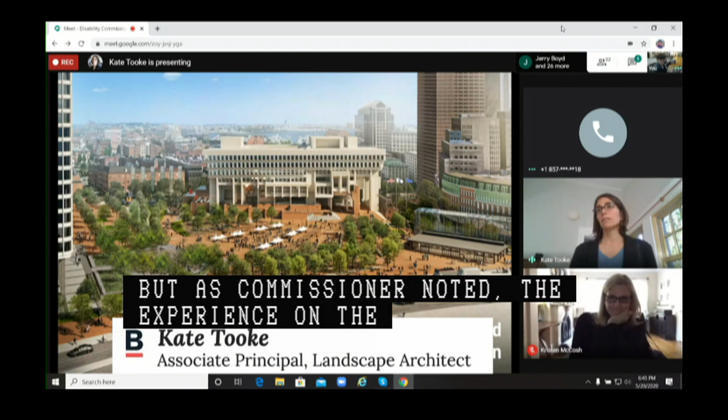Sure. The bricks we're using are high density, low porosity brick that has an anti-slip finish, and we can ensure we are speccing really the best product on the market when it comes to wire cut brick with that non-slip finish. These are not old Boston bricks, and I know there are a lot of really bad experiences with bricks throughout the city, but as the commissioner noted, the experience on the plaza with great detailing and high density, low porosity, non-slip finish brick has been really positive. Over 5 years of messy winters and tough snow removal practices and salt and really all the city can throw at that condition, those bricks have weathered well and are still a smooth and reliable surface to navigate over.

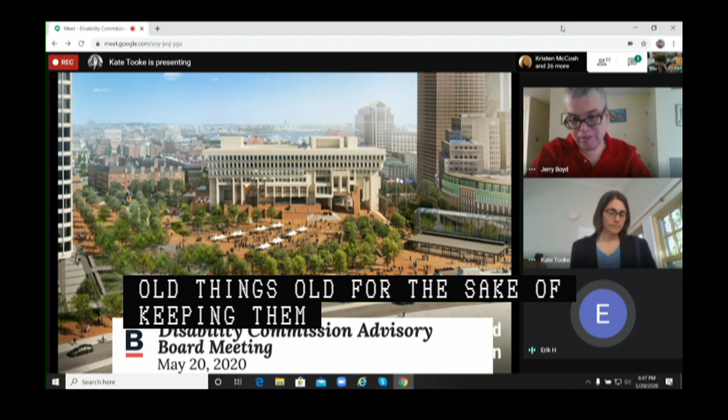I have never been on any brick, wire cut or otherwise, that wasn't still brick. Even if you run it in the direction of travel, when your wheels, which are different sizes and maybe set at different widths, fit into those grooves, you can find yourself being pulled in a direction you didn't intend to go. It can cause wear on the motors of a power chair, and it can cause wear on your own body, on your shoulders, as you try to push, and then you fall into a groove, and the traction changes up and down, up and down.

It's really unpleasant. I would challenge anyone who's advocating for this to try it for themselves. You can use any of my chairs.

No, just that, typically if this was an in-person meeting, we'd have the opportunity to exchange phone numbers and email addresses. I wonder if there's a way that people, since the Preservation Society has their own advocacy group, can contact each other easily. I would be very interested to talk with other people who are concerned about this, because this really is an access issue. There are many public events I enjoy at City Hall, not least Pride. Pride was completely inaccessible. There were temporary barriers everywhere, the restrooms were up several platform stairs, it was not accessible at all. The ramps were blocked by trash and recycling bins. I saw a crowd of people in wheelchairs on either side trying to get through. So brick is just adding insult to injury when it comes to that. I would like to talk with other people, I don't know how we could do that.

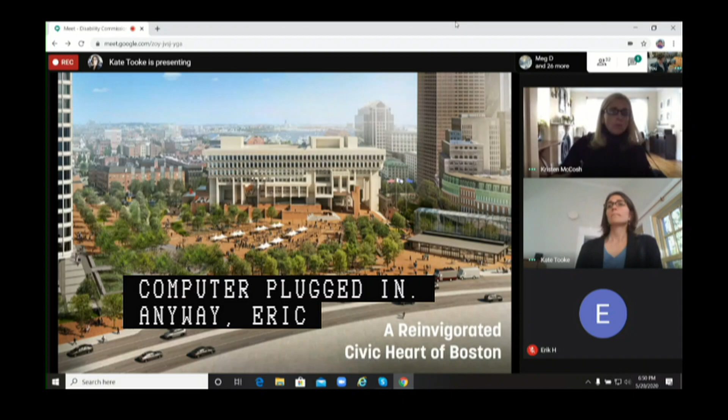Sorry. Anyway, Erik, so the lens of people who are disabled really comes from my office. That's why I'm here, that's why I'm an appointed official, that's why the property management and public facilities take our input extremely seriously. They know we represent the community, and believe me, I understand. I've been a wheelchair user for many years, and the old plaza, the existing plaza, is actually a nightmare to get around. I am not discounting that at all.

I will say, like I said a few minutes ago, that the installation by the T was done very thoughtfully, very well, with a solid underpinning of whatever layers they do below the brick. So it is a good installation, and it is actually accessible. There will be no more steps up to restrooms, no more slopes and temporary barriers. As the design showed, there will be places for people to go, to set up, and it really will be much more accessible. But I'm not discounting anything that you're saying.

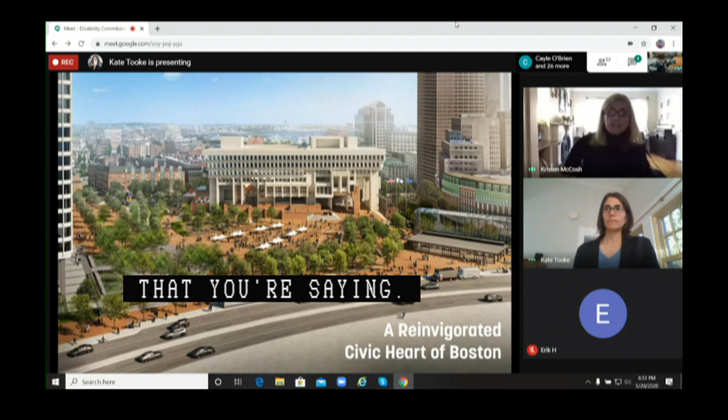But what I'd like to do, since this seems to be the consensus, I'd like for you all to email me your thoughts, and then we'll get them together and take them to the group. So you can email us at disability@boston.gov, and we'll make a compilation of all these comments and review them with the team. That's something we will commit to.

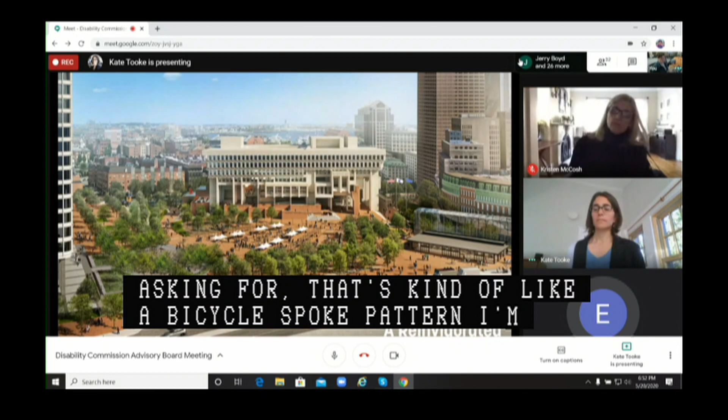Thank you, I appreciate you being willing to hear our thoughts. What I'm asking for is kind of like a bicycle spoke pattern, but I'm looking for something more in the way of a spider web. I'd like to be able to speak with other people to see if we could add to the brainstorming effort ourselves. I don't know how to arrange that quickly, but it would be good since we're all here now. I really think I can take everybody's comments. Like I said, I know these comments very well, I know the feelings, I am a wheelchair user. So email us your comments and we'll do a good job relaying them.

We have time for one more question, from Dolores.

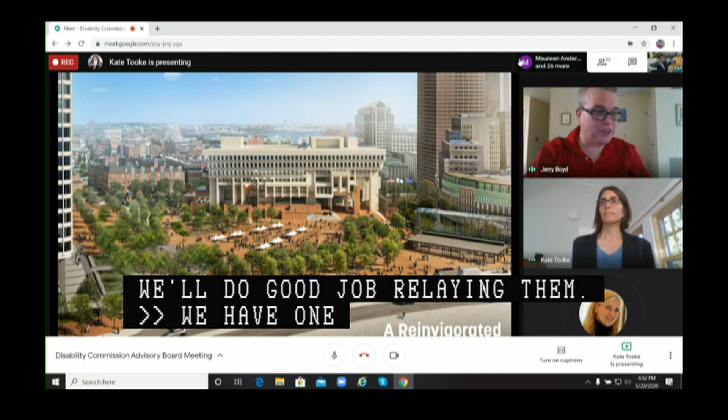So Kristen, are you saying that we can't exchange information and form a working group here, that we have to look down the list of names and Google people? I'd rather not have it be so diffuse. I understand you're willing to take our comments and I appreciate that, but that's only half of it. I'm interested in using this space and the fact that these are conscientious citizens who come together out of a concern. I think we ought to be able to communicate in the future, whether on a mailing list or a one-time opt-in thing. I don't think it would be difficult to do.

Well, Erik, would we be able to follow up offline, you and I? Well, we would lose the opportunity. I have everyone's contact info, and we have a large mailing list, we're very plugged in with the disability community, so we do know the channels to go through. But in terms of the meeting time and agenda, it's been made very clear to people, so we'll follow up offline if you can send me your contact info. Sure, thank you, how do I reach you?

Disability@boston.gov. Is Dolores still available? If she's not, then we can move on.

I just have a quick question. I was wondering if there's any kind of clear sealer that you could put over the bricks that would really hold them in place and stop any movement from them.